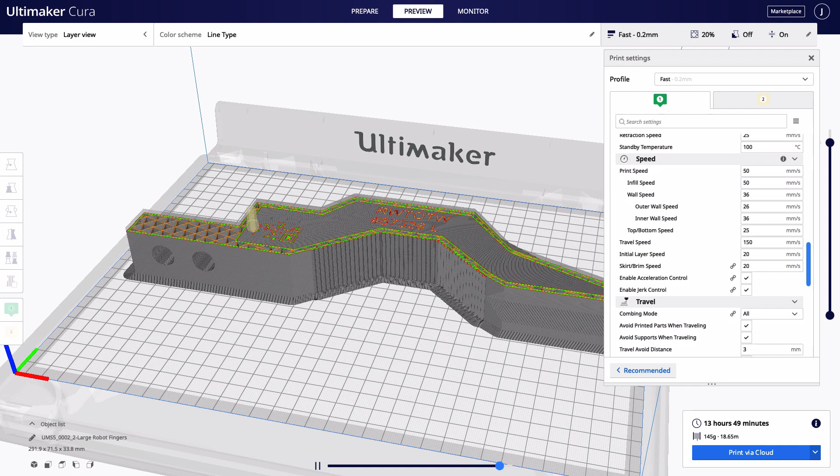That's why we've introduced a substantial improvement to our slicing workflow in Ultimaker Cura: intent profiles. Whether your intent is speed, accuracy, or visual quality, spend less time configuring settings and more time innovating.

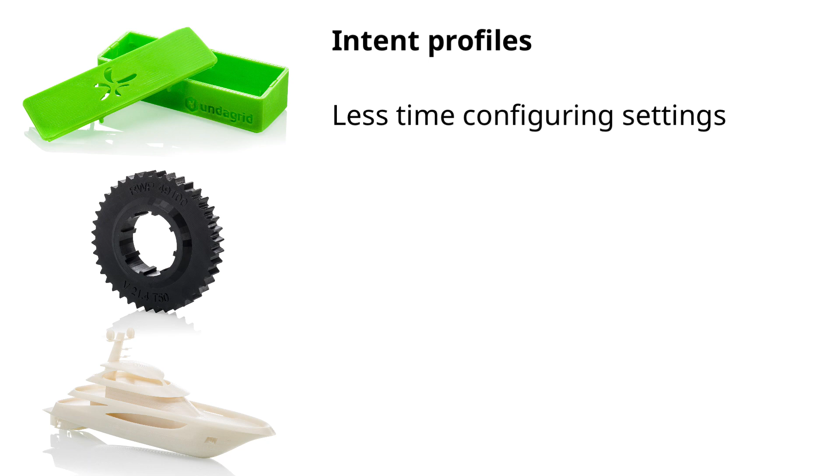Intent profiles show the true value of 3D printing and will speed up adoption within your company by simplifying the print preparation workflow, saving significant time, and producing the results you need for a wide range of applications.

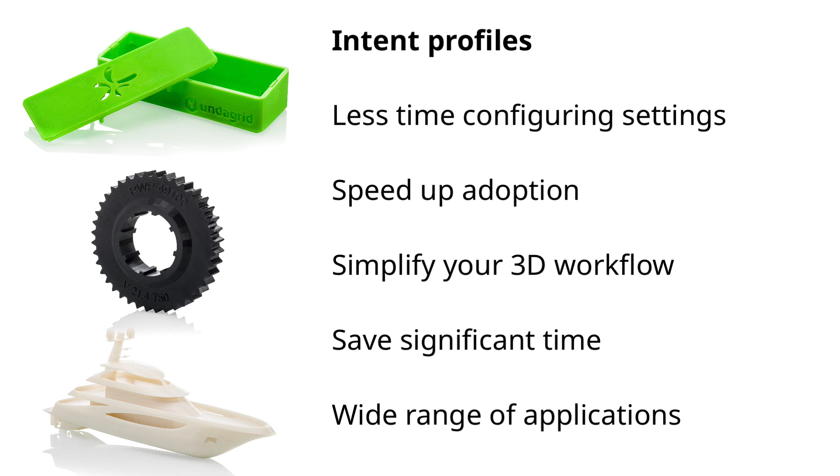Print quick iterations of your initial prototypes, visual concept models, or parts with strict engineering tolerances, all at the click of a button. Here's how it works.

Start by loading a 3D model on the build plate. To do this, you can click the Open File button at the top left corner of the screen, or simply drag and drop your model onto the build plate.

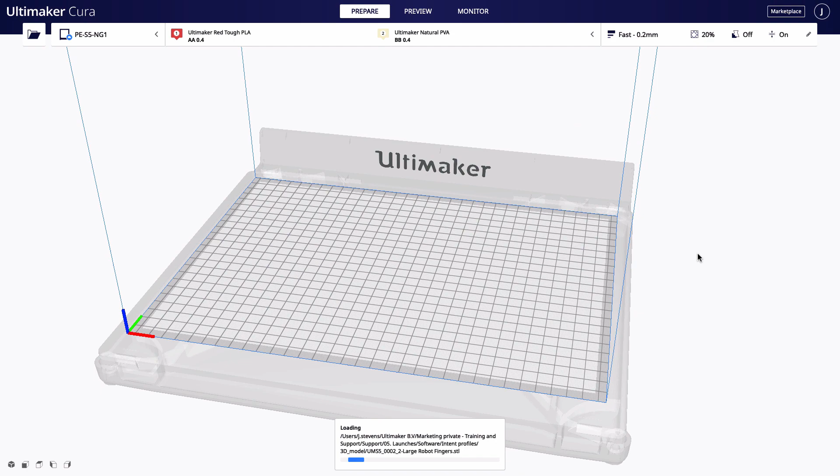Intent profiles are available for common configurations. We'll use an Ultimaker S5 loaded with tough PLA and PVA with 0.4mm print cores.

Open the Settings panel to choose a printing strategy. Available intent profiles automatically show below the default profile.

To print parts with high-quality visual characteristics, use the Visual Quality profile. To print very accurate models with tighter tolerances, use the Engineering profile. To print designs in the shortest time possible, use the Draft profile.

The software will automatically configure all the necessary settings to suit the intent.

We want our initial prototype printed quickly. As the default profile isn't intended for quick results, the print will take significant time to finish.

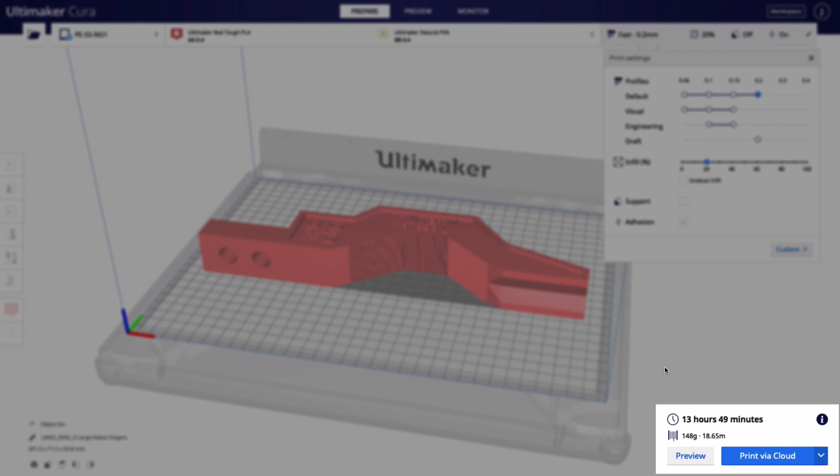As a solution, let's try slicing with the Draft Intent profile. Already you can see that using this intent profile has cut the print time significantly. All we need to do now is hit print.

By using the Draft Intent profile, we can validate the concept faster, accelerating your product development cycle. That's it. We've prepared a print using an intent profile.